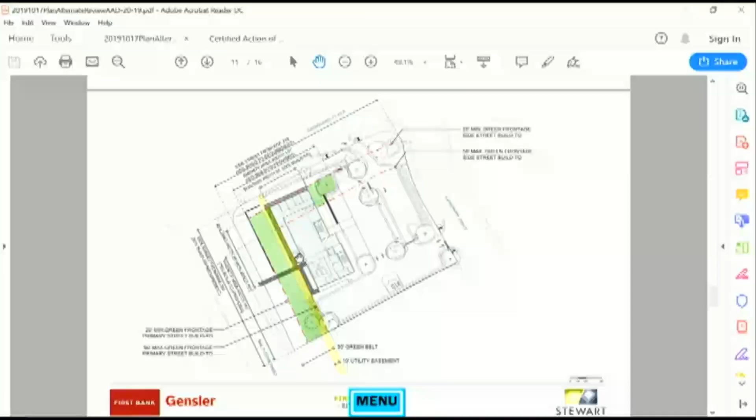What we are doing here, I think, is greatly enhancing the experience along Six Forks Road. We're pulling this building up to the corner to try to meet that build-to as much as we can. As Carter mentioned, there are two constraints on the site: the green frontage requires green between the building and the street with no parking, and there's also a green belt that is part of the deed restriction, meaning no built elements or parking in that area. So we're really confined to pulling the building back to that 50 foot — we can't pull it any closer due to those constraints.

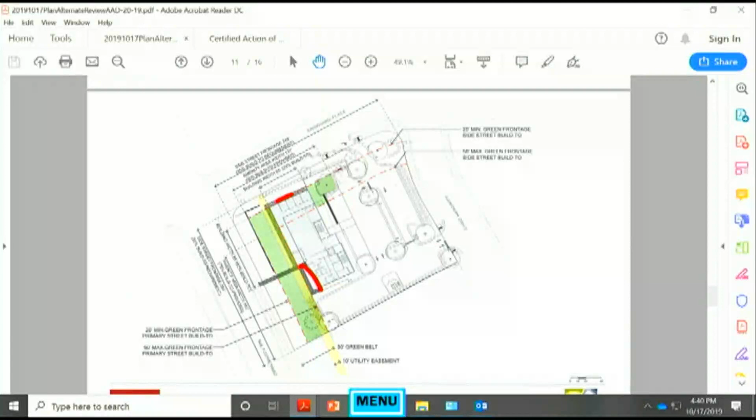Along Six Forks you can see we've got the long side of the building, with a little bit of a notch in the building right here. That's why part of the building itself is not meeting some of the build-to — the reason is to enhance that entry and create a different feeling along the street, rather than just a monolithic wall. Along Browning Place there's a build-to that we're meeting with the building itself: 23% of the building width meets the build-to, and we're required to have 35%, so we're just not quite getting there.

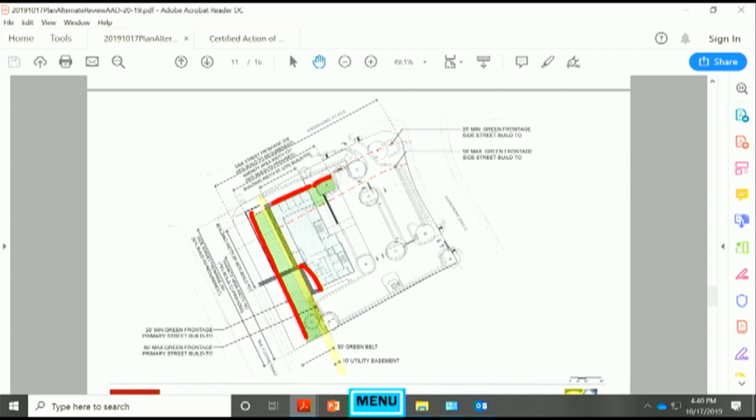The rest of that requirement is being met with the amenity area in that location. On Six Forks, we have amenity running along the entirety of Six Forks Road, which is really enhanced planting — I'll show renderings in a moment to give an idea of what that may look like. We also have a wall, a little site wall helping to hold the grade to create a flatter lawn in front of the building, since there's a difference in elevation from the street to the building itself.

So that's helping to hold that, but it's a low site wall that's not meant to create any visual deterrence of the building, instead create a little bit of an edge. And then, enhanced planting. We also have a 10-foot utility easement that we have to stay out of, which is what that yellow area is.

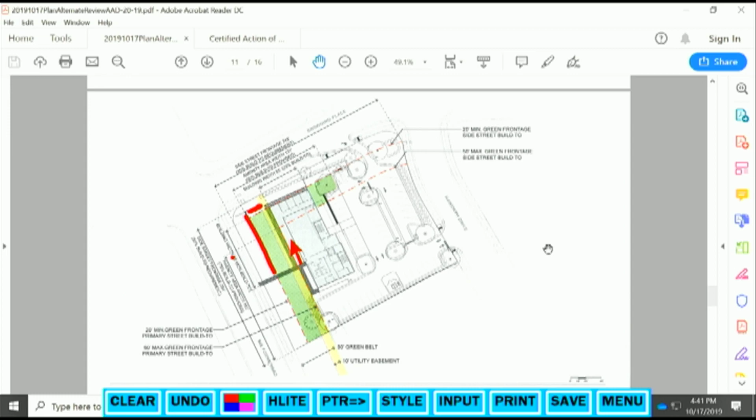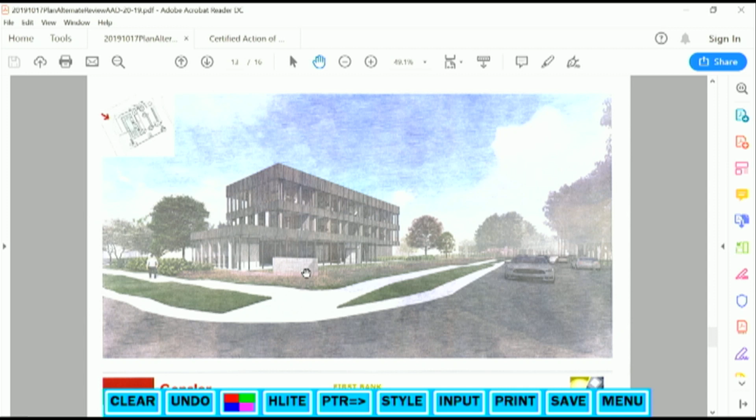This is looking back down Six Forks from the North Hills area, looking more south. We haven't quite figured it out, but there will be some sort of signage incorporated into this, and it may be built into the little site wall itself.

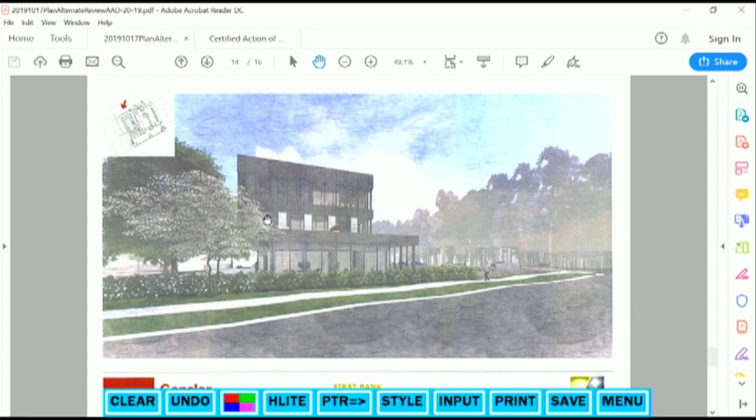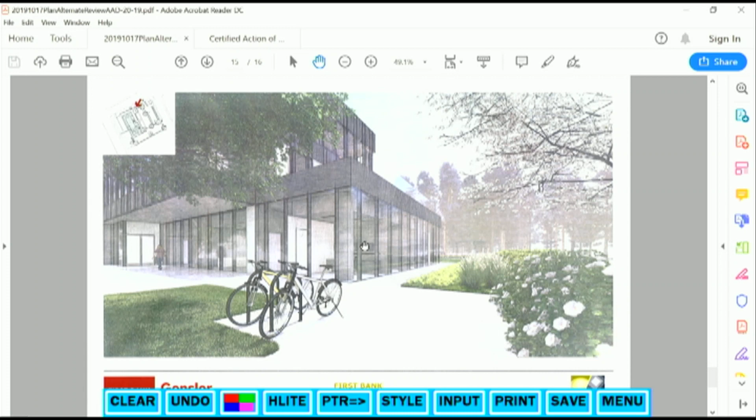Enhanced planting to see both from inside the building looking out and from the street back into the building, trying to keep the views open of this nice glass wall. A little bit closer, looking at the amenity area, the amenity zone, sort of a stone apron, and then building upon the landscape in that area.

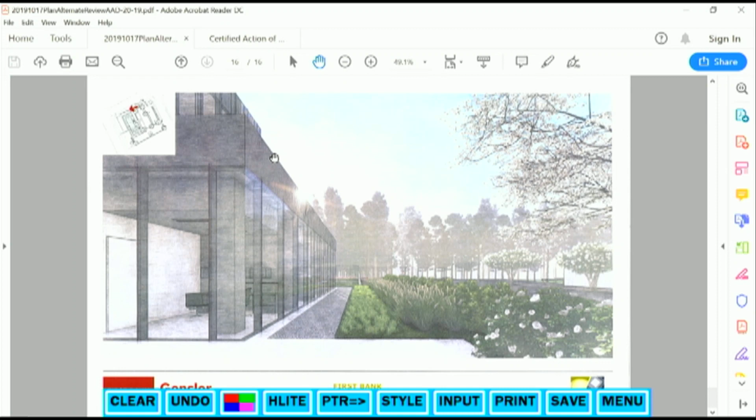So I'm happy to answer any questions at this time.

Do you see any proposed uses? I'm not asking because I have a problem with it, I just wanted to flesh out a little bit more, like the green space in front of the building.

How do you see that being used, this area along Six Forks? We've been talking with the owner about possibilities. They're really keen on being a member of the community, and it is a bank that is more of a local bank, so they see themselves as part of the community. They've talked about having community events or even renting out some of their space for various events.

There's also going to be a rooftop terrace up here, just on the second level, and it will have views down to the amenity areas. The thought is that this could be used for tents and possibly festivals, carnivals, get-togethers. But on a day-to-day basis, it's more of a visual aesthetic piece.

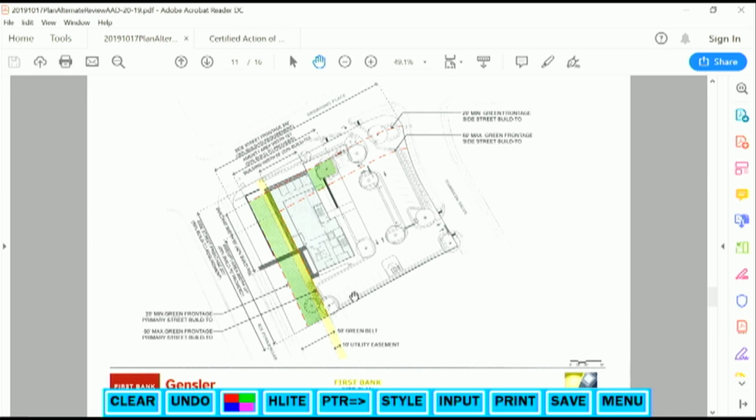Could you talk a little bit about how the proposed build-to along Six Forks matches the adjacent existing build-tos? Sure, yeah, so to the south, let's see. Is there a Google Earth at all on this computer? That would be helpful. G Drive. There we go.

You'll see that there's a similar condition of having the green belt and green frontage. There's quite a large green space on the adjacent property to the south. This is our property right here, identified with the red tag, our building currently surrounded by the parking. We're pulling it up to this corner as close as we can.

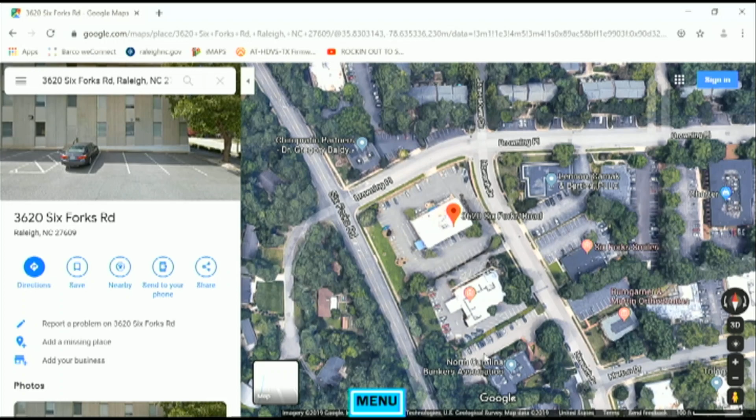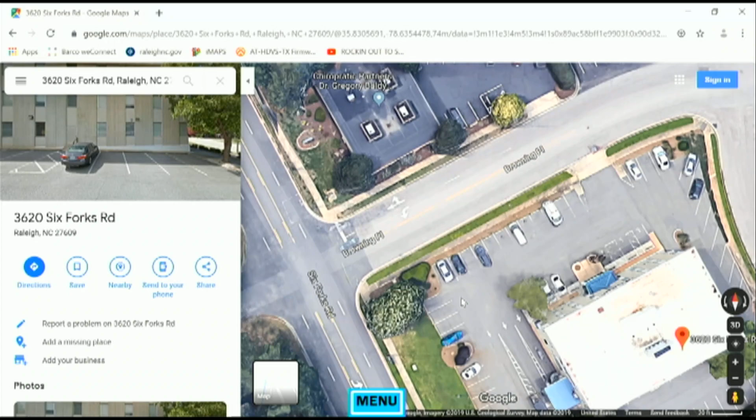How does that relate to the building on the other side of Browning Place? Up here? Yeah. Oh yeah, okay. So this is the closest building to the north. So it really is going to be pretty in line with that one.

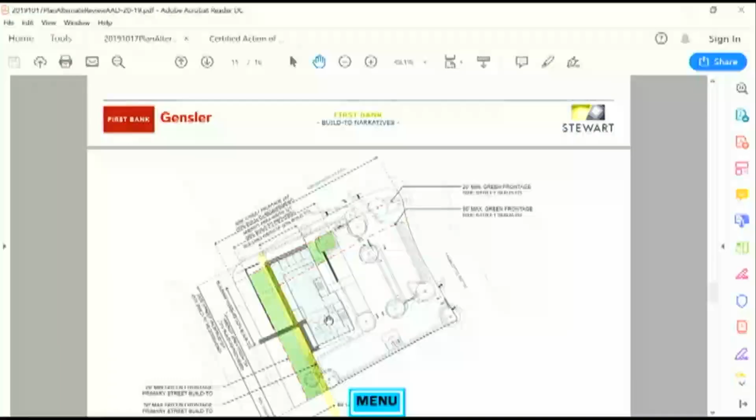A question about pedestrian access - can you get to the front entrance walking without going through the parking lot? I can't tell exactly how that works, but it looks like it kind of wraps you around the back of the building to enter. Right, so right now we're showing it from Six Forks Road with access to the front of the building, front and back, it's two-sided really. And then there is a connection around to the front itself. As far as from Browning Place, this is something as we're going through plot plan that we will likely need to provide a connection over here to Browning as well. So there's an entrance on the Six Forks side as well? There is.

And then I'm curious if any of the landscape architects have ideas for the green space. Personally, it seems more likely that it could provide value as a green infrastructure type space, landscaping, trees, more so than an event space. That's kind of my personal gut feeling about it. I don't know if there's any thoughts you all have on how to make that more functional or flesh out some of the details of making it a useful green space.

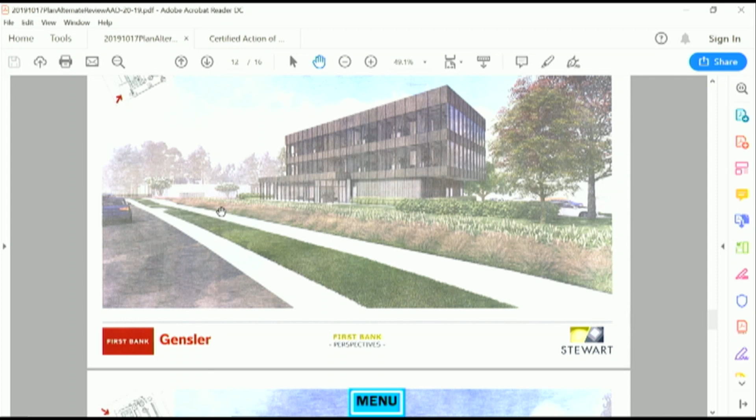So I'll speak first, and Martha might add something. The edge along Six Forks Road has been planted more heavily to hold that edge, while there's more turf closer to the building to keep a clean edge and view out. There's also a slight drop in grade, so the more heavily planted edge along the sidewalk sits at the same level as the sidewalk, holding that edge, then drops down toward the building.

Interested to hear any thoughts you all have. I was just curious if you used that space for some sort of GI, would that work with the grades? It looks pretty flat. If we used it for what? Sorry, like if it was a rain garden type or stormwater capture feature.

One challenge with the site is that there's currently no storm network, so everything is surface drainage. There are two swales that come around the front of the building on the Six Forks side, taking water around to the north and south. To take it across the site, we're filtering it within some of the on-site medians, and we have curb cuts through the medians to take it to the storm network.

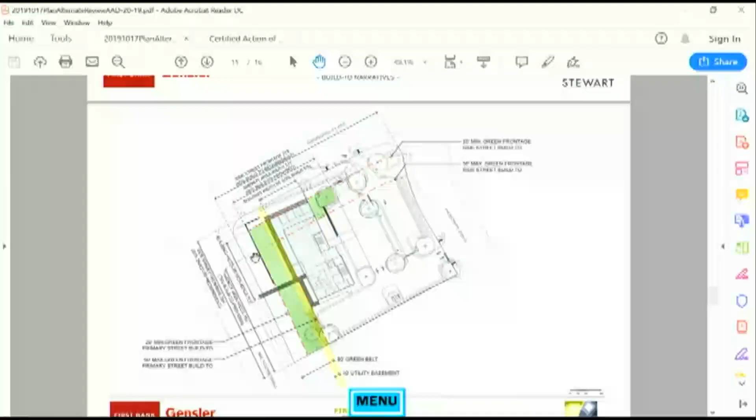As a plot plan, this doesn't have any stormwater requirements, correct, due to the existing impervious surface. The low point is on the opposite side of Six Forks, going down Hayworth Drive. So we're bringing the water down this way. Yeah, the Six Forks side actually drains toward the building, so we're having to put a swale right here to catch that.

Any other questions for the applicant? Okay, we're going to table it and discuss. Actually, is there anybody from the public who would like to speak? All right, come on up, and remember to state your name and address.

My name's Anna Hardison, 3747 Jamestown Circle. Our homeowners association will be directly across and possibly affected by the First Bank coming in. I had some questions for Ms. Wagner: are we widening Six Forks Road, and if so, how is that going to affect things?

Not with this project—there's no widening happening that we're doing. I asked because there are several site limitations already at that corner of Six Forks and Browning. That concave sign is a huge hindrance, and it's already a dangerous intersection with a lot of accidents. There's also a holly bush that sits a little further back, and if you're trying to avoid the sign, people hang back and have to pull out kind of far.

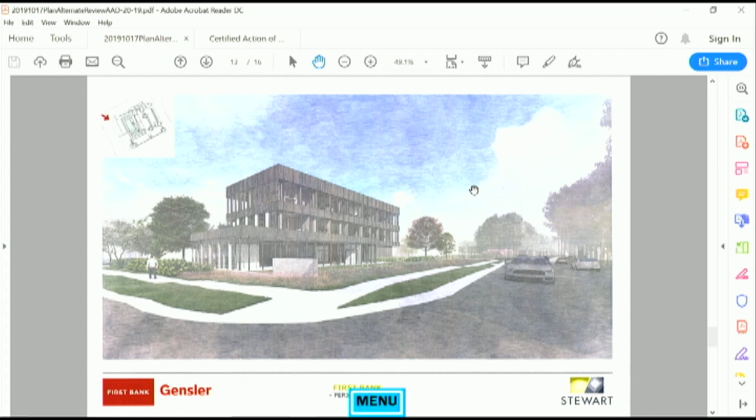Even the sidewalk in the right of way, we're not touching in any way. So it's about right here, where my hand is. From the plan view, how does it relate with your tie-in to that sidewalk?

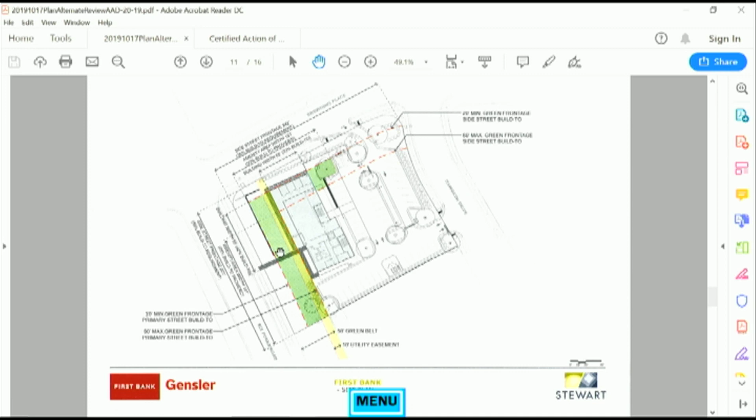Yeah, I think it's about right here. But we'll make sure that that's showing up on our survey, 'cause I don't see it right now on this plan view. Okay, thank you. Yeah, there's the curb cut. Okay, yep.

Okay, now I'm going to table it, and we're going to have our discussion. Oh, is there someone else from the public? Yeah, absolutely, just state your name and address.

And if I may, I think I have a question for you. Okay, I'll stay right here. My name is Ed Patterson, and I live across the street. I'm maybe the only homeowner within 100 feet of this property. I'm straight across Six Forks Road at 3605 Browning Place.

Okay, did you say there would be partying going on the roof? Is that what I heard? A party on the roof.

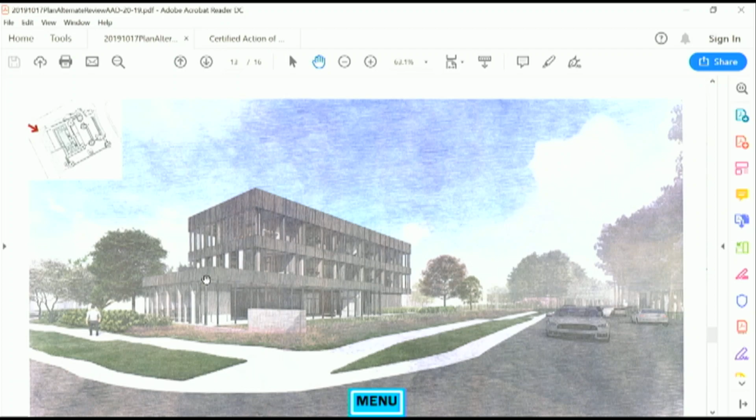I don't know what will be happening on the roof, except that we're designing a terrace right here, so this would have some availability for some seating. This is a bank, so it will have banker's type hours. But there is the opportunity that they might rent that out, or have a community meeting that would happen there, make it available to their customers.

Is there any chance I could get a standing invitation to whatever goes on? Ask these guys about that, these are the architects, they have more connections than I do. I'm just concerned if there is something over there that would be loud, you know, and make things less pleasant than they are now. And you really don't know. I would doubt that, my guess is that this would improve upon how things are now. Well, it will make you look better than what's there now. Okay, thank you, but it's a good point.

Okay, can the architect speak to the intent of that? Absolutely, do you need me to come up? Please, and state your name and address.

My name is Beth Mitchell, and I work with Gensler. My address is 201 Plainview Avenue in Raleigh. So the roof terrace that we're discussing actually fronts the large conference room. The ground floor of this building is the bank branch, which would be open to their customers, and then the upper floors are their personal offices. So it's more of a corporate function than it is necessarily like an assembly space for parties or things like that. It's where they would entertain potential clients. And like I said, it's adjacent to the conference room. I think employees might eat lunch out there, but I think a midnight party is probably very rare, having met this group.

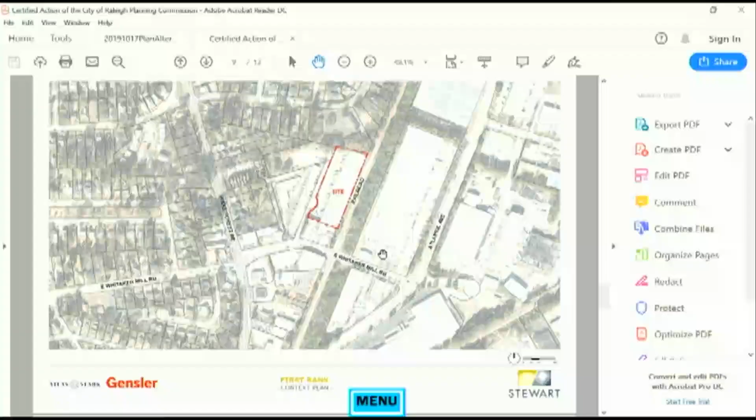Hi, my name is Kristen Stanzio, 139 Daneboard Road, Durham. This is an existing warehouse building. It is a fairly industrial site.

You can see from the aerial image and also in the next image, it is constrained on the site to the rear and both sides, pretty much along the property line, making it pretty much impossible to have a solid waste facility to the side or the rear. So we've placed it to the north, which is as far as it can be from the right-of-way.

It's also in front of a berm between the adjacent property, and it will have a wood enclosure, which will take from some of the architecture. The architecture has some red cedar on the exterior, and we will stain it to match the red cedar on the building. When it was the cart corral, we were proposing a 6-foot tall fence.

But with the proposed 3 restaurants, the cart corral was going to require too many carts, so we'll have one 8-yard dumpster and one 8-yard cardboard recycling. So we've raised the fence to 8 feet tall, and then we'll have enhanced landscaping here with various heights of shrubs and trees, mostly evergreen, to further screen the adjacent property as well as what would be seen from the right-of-way, and somewhat from the building as well.

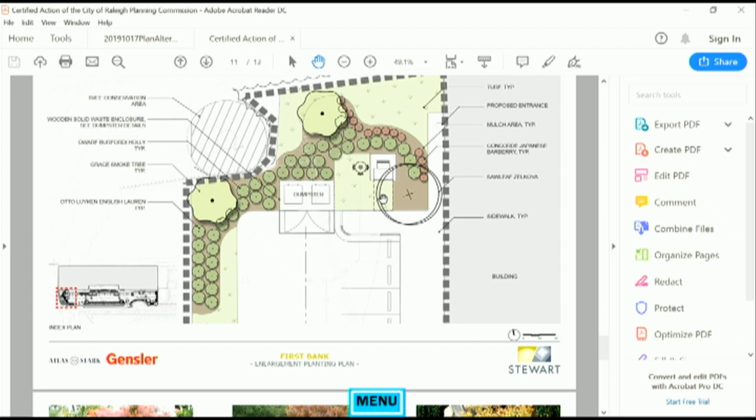Is that just a backup generator, or is that something that would be used? I'm not sure, you know. Yeah, okay, I'm cool. Just apologize, sorry.

Will that be screened as well, the generator? Yes, by the vegetation shown here. It won't be completely enclosed.

Do you know how tall that generator is? Sorry, I don't. You don't. They're pretty tall generally. Yeah, that's what I was going to say. I wonder if that—because some of those are hollies. Yeah, dwarf. That generator might peek up over that. There's an English laurel, maybe we can...

I'm sorry, are you asking about the shrub around the generator? Yeah, it's a dwarf Burford holly. They get about 4 to 5 feet tall, maybe 6.

The symbol's different. I'd be more concerned that people are gonna look out the back and see that generator rather than see the dumpsters, or coming into the proposed entrance, right past it. But I'm not sure.

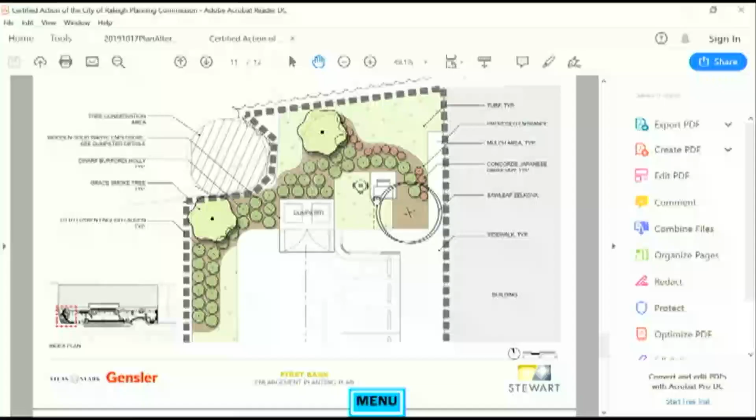There will be an 8-foot fence around here. And that sits back, so it probably would somewhat be visible from the road, but it does sit back.

Have you considered putting it in an enclosure? I know there's regulations about access to the front of it for refueling and all of those things, but just a question. I don't believe it's been discussed, but it would definitely be something we could discuss.

Anybody else? I guess my concern with 11,000 square feet of restaurant is just the smell I worry about with the dumpster.

Go back to the plan. So this is the proposed dumpster. The restaurant space is primarily on this side of the building. I think there is one maybe back here, but the majority of this space is office. That was one reasoning for switching to the dumpster rather than the corrals, is just the number of corrals we would have, attracting flies, bees, smells.

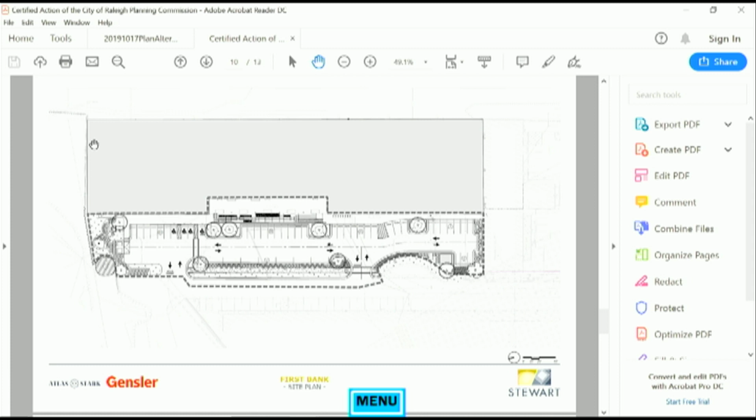Yeah, well, you still have all your food waste going back to those dumpsters. You might consider something like an underground system like the Moloks that they tried over on Wilmington, because their smell is much less, much more contained, especially in the summer. Okay.

Yeah, that's not what we're here to necessarily make a finding on. But at the same time, just because that is a proposed entrance to the office space, it would be a lot more desirable, I think, if you manage the smell. So it's just an idea.

Any other questions? Okay, thank you so much. And seeing there's no one here from the public, let's table it for discussion.

So I think on site, when I look at it, there's not a ton of options, right? And I think they've selected for the dumpster location probably the most reasonable one. It's furthest from the right-of-way, like the street ends before you even get to that place or get to that part of the site.

And I think what we talked about, like alternative ways to maybe handle food waste, is something that I think could be very valuable to the overall development. What do we want to talk about with that generator?

I mean, technically, I'm not sure that the city requires that those be screened, but it probably, again, just for visual appeal at the entrance, it would make a big difference - they're pretty big and ugly. Can the plantings baffle the noise in some way associated with it?